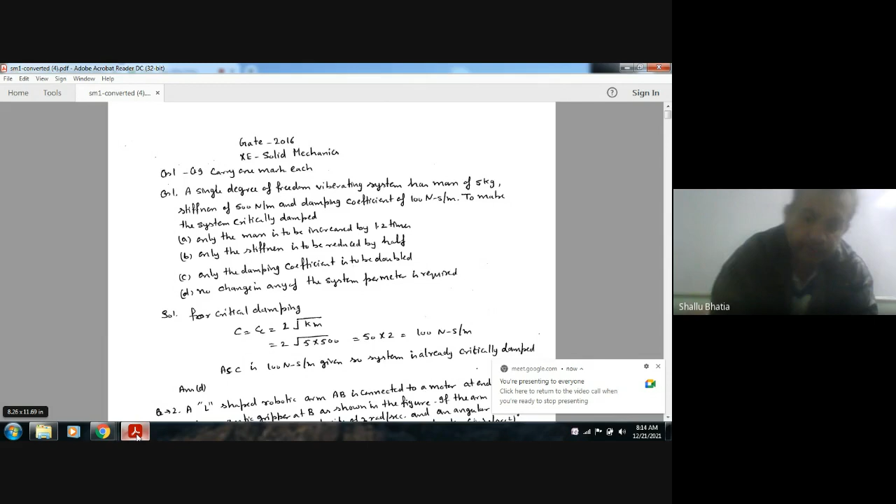Question 1: a single degree of freedom vibrating system has mass of 5 kg, stiffness of 500 Newton per meter and damping coefficient of 100 Newton second per meter. To make the system critically damped: Option A, the mass of the system is to be increased by 1.2 times. B, only the stiffness is to be reduced by half. C, only damping coefficient is to be doubled. D, no change in any of the system parameter is required.

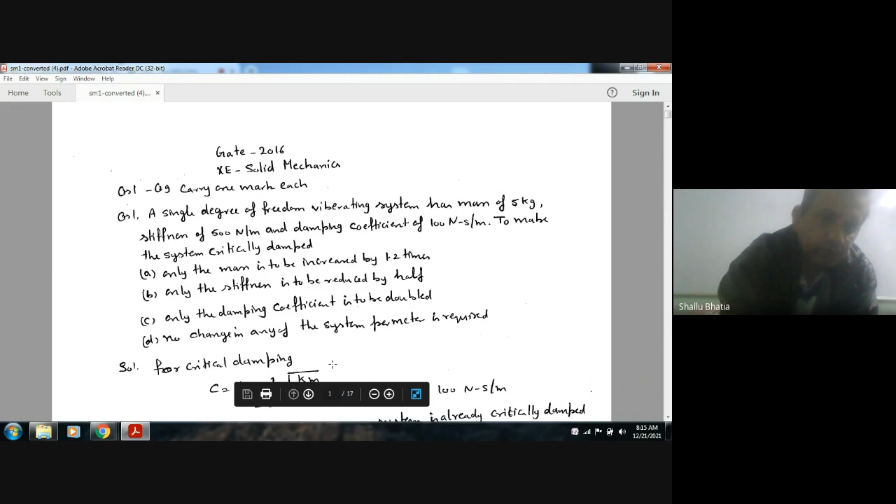So to make the system critically damped, we have to check its critical damping coefficient. The critical damping coefficient CC is given by CC is equal to 2 root K multiplied by M.

Here K is 500 Newton per meter, and mass is 5 kg. Finding out CC, that comes out as 100 Newton second per meter. Now the given C, the damping coefficient, is also 100 Newton second per meter. So there is no change required to make it critically damped because the damping coefficient is already according to the critical damping condition. So the answer is D.

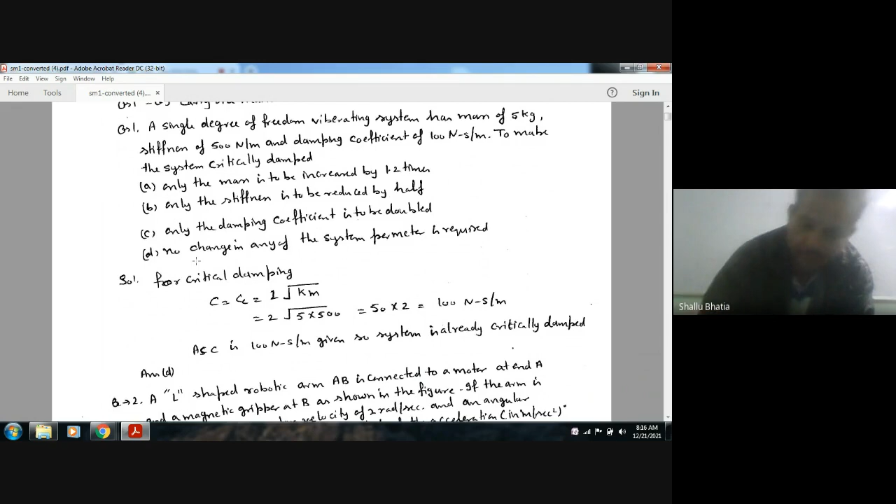Next: a L-shaped robotic arm AB is connected to a motor at end A and a magnetic gripper at B, as shown in the figure. If the arm is rotating with an angular velocity of 2 radian per second and angular acceleration of 3 radian per second square, the magnitude of acceleration in meter per second square at end B is required.

We have to find the acceleration of this end, where omega is 2 and alpha is 3 radian per second. First, this is the point about which the arm is rotating, so we calculate the distance to get the radius. This is point 0.4, this is point 0.3, so it should be point 0.5.

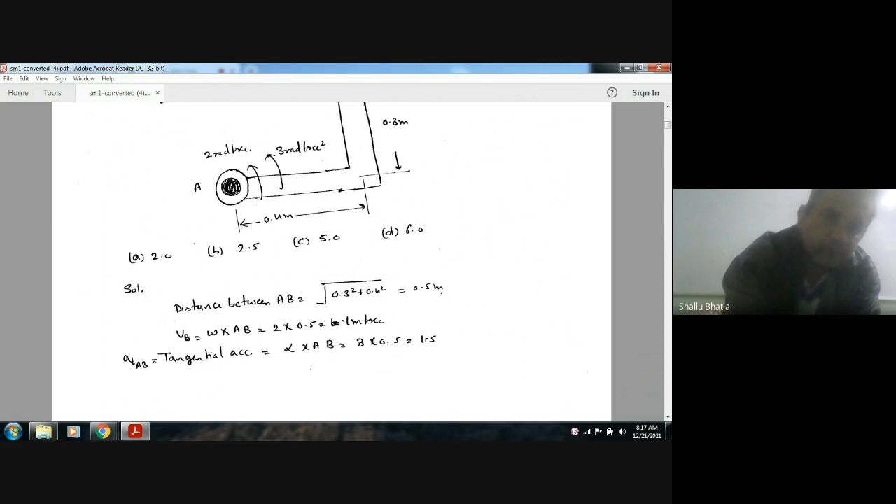The distance is 0.5 and angular velocity is 2 radian. The velocity of point B is omega into AB, that is 2 into 0.5, that is 1 meter per second. Now the tangential acceleration: alpha is 3 radian per second and AB is 0.5, so tangential acceleration is given by alpha into AB, that is 3 into 0.5, that is 1.5 meter per second square.

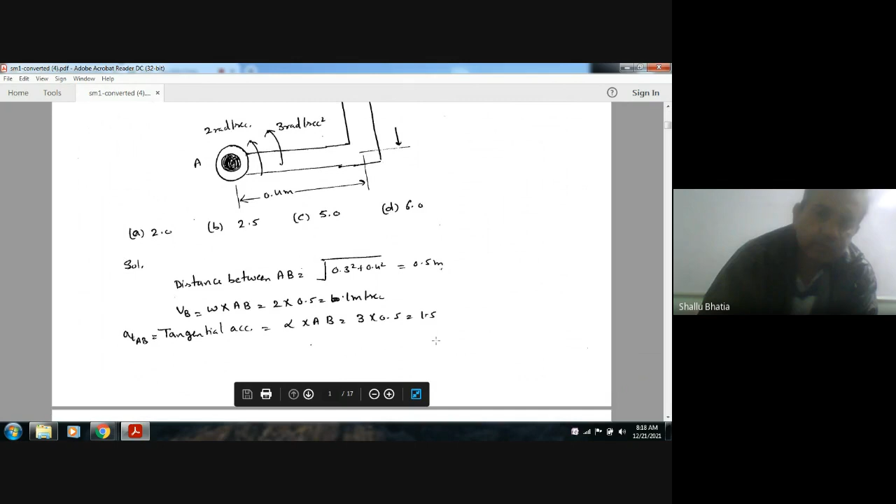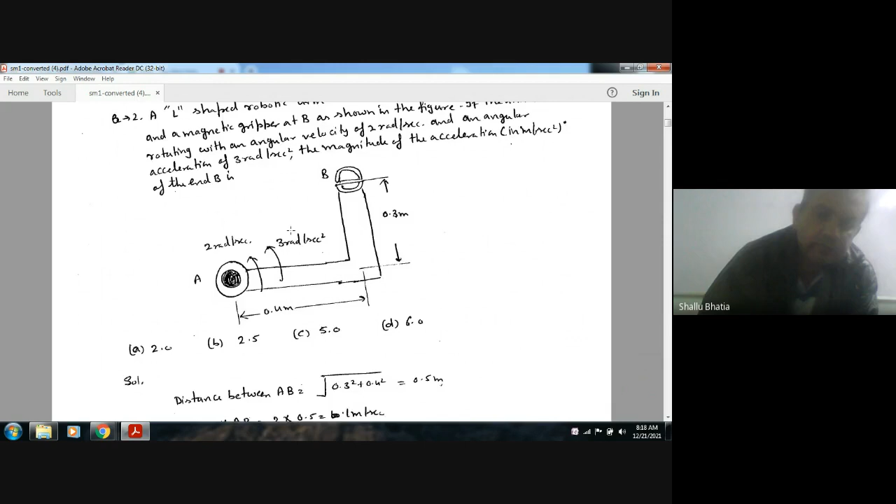There is also centripetal acceleration due to the rotation, which acts from the point where we need to find it toward the center. So it will act like this, and its magnitude is v square by radius. Radius is 0.5, so centripetal acceleration is 2.

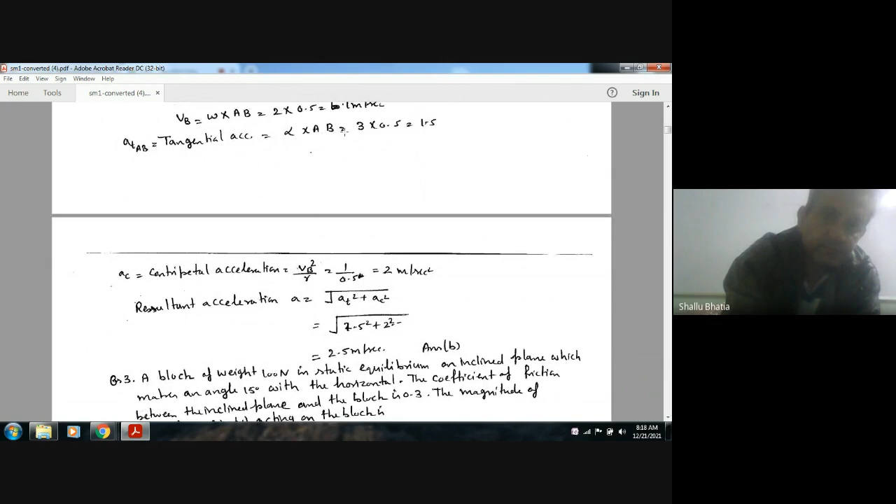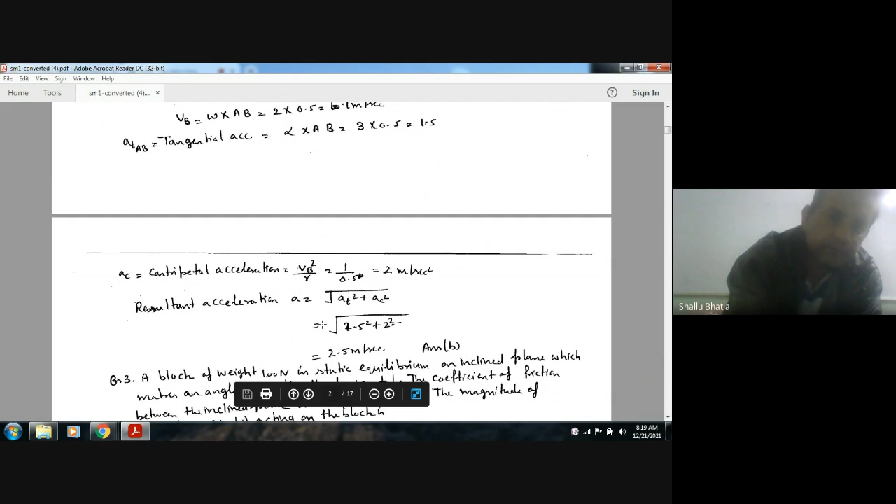The tangential acceleration acts perpendicular to AB and the centripetal acceleration acts toward A. So resultant acceleration is obtained by scaling 1.5 and 2, squaring and adding, then square rooting: 1.5 square plus 2 square gives resultant acceleration of 2.5. Option B is the right answer.

Next: a block of weight 100 Newton in static equilibrium on an inclined plane which makes an angle of 15 degree with the horizontal. The coefficient of friction between the inclined plane and the block is 0.3. The magnitude of friction force acting on the block is required. So this is a block given with weight 100 Newton, angle alpha 15 degree, and we have to find the magnitude of friction force acting on the block.

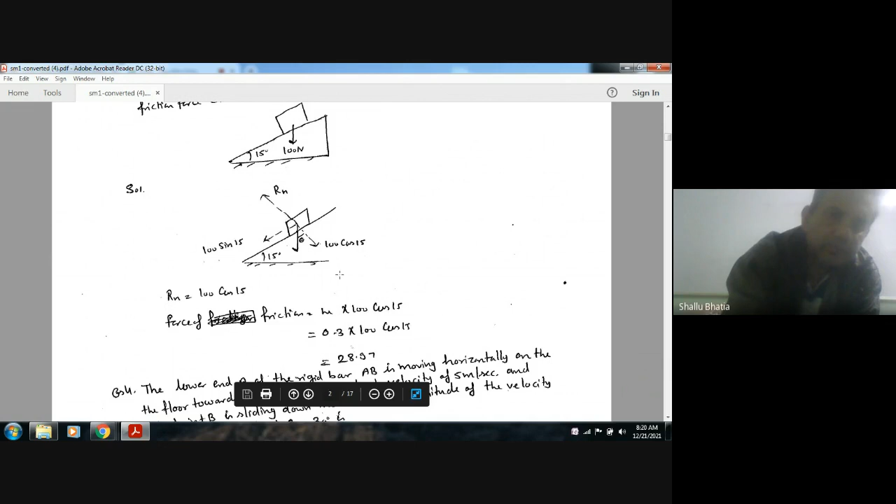Weight is 100 Newton, its component in this direction is 100 cos 15 and in this direction it is 100 sin 15. Balancing this, Rn is equal to 100 cos 15. The friction force will be according to laws of limiting friction, that is mu Rn. So mu is 0.3 and 100 into cos 15, giving 28.97 Newton.

Next, question number 4: the lower end of the rigid bar AB is moving horizontally on the floor towards right with a constant velocity of 5 meter per second.

This end is moving with velocity 5 meter per second. The point B is sliding down on the wall. The magnitude of velocity of point B at instant theta equal to 30 degree is to be found. Option A 0, option B 4.34 meter per second, option C 7.25 meter per second, option D 8.66 meter per second. Now this can be solved by using instant center.

We assume there is a slider at point A and also a slider at point B. This slider is moving in this direction and this slider is moving downward. So we take this as the fixed link, these two as sliders, and this as link 3. This is link 2, this is link 3, and this is link 4.

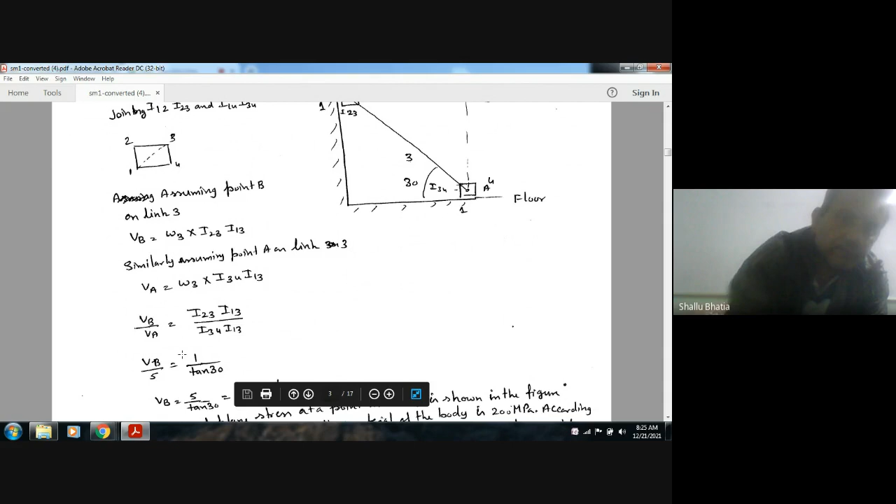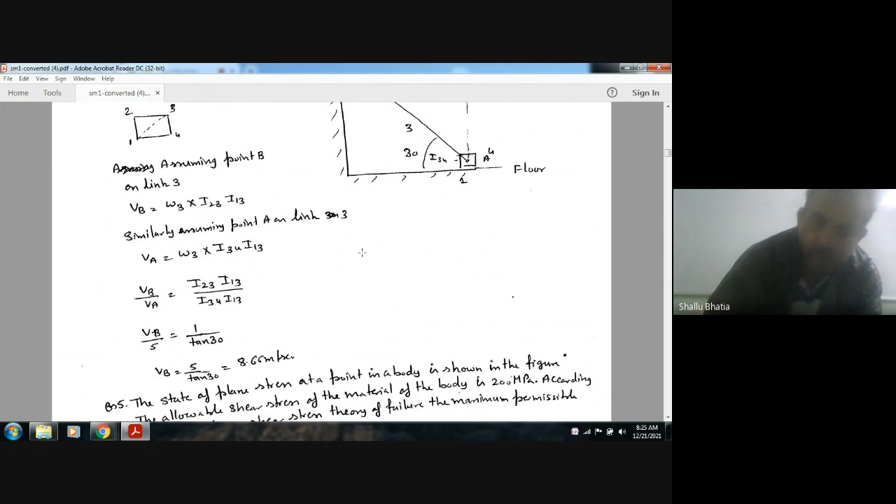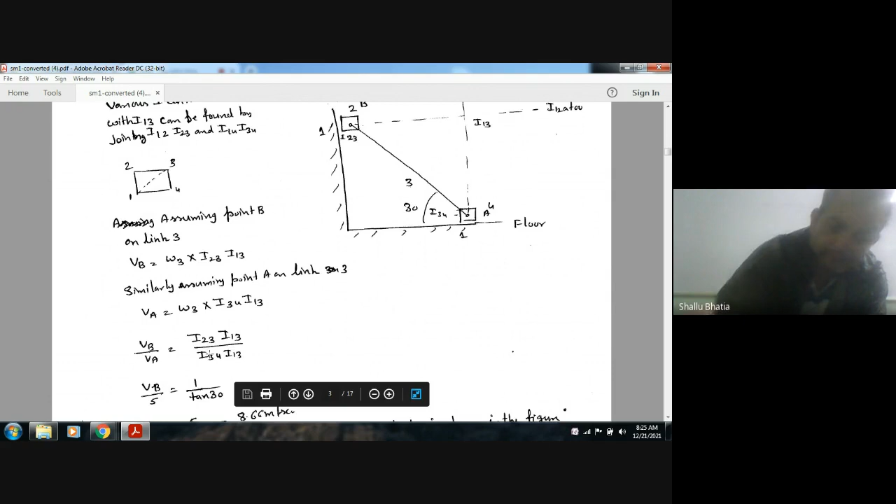So VB by VA: VA is your velocity 5, and this angle is your 30 degrees. I23 I13 by I34 I13, this will be base by perpendicular, that is cot, or 1 by tangent 30. So from this, as V is given as 5, we can find out VB.

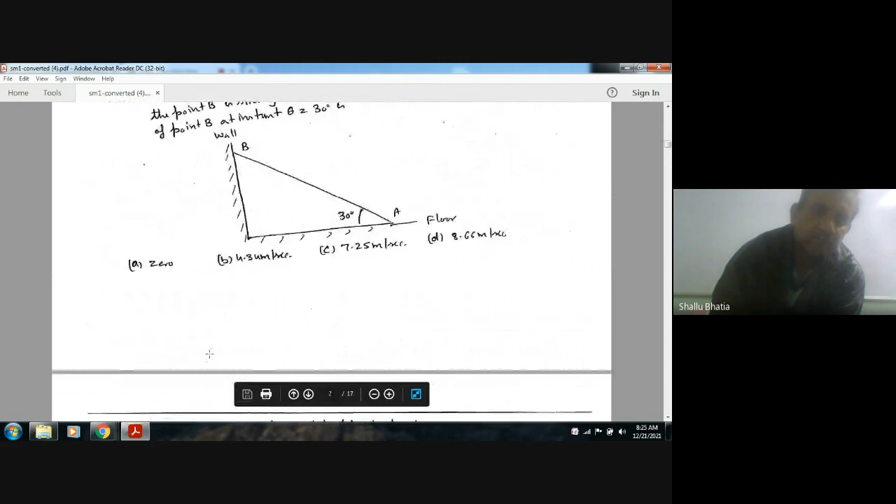That is 8.66 meter per second, so the answer here is 8.66. So when the velocity of A is 5, the velocity of B in turn is 8.66.

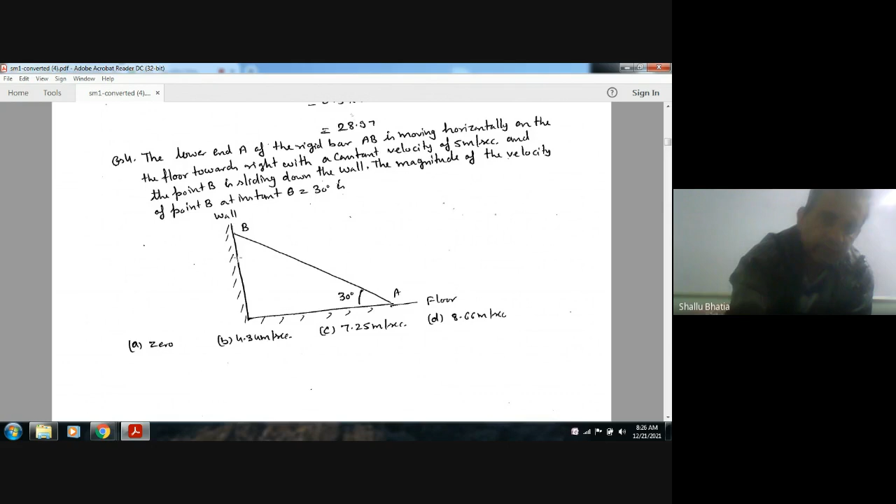Next question. The state of plane stress at a point in a body is shown in the figure. The allowable shear stress of the material of the body is 200 MPa. According to the maximum shear stress theory of failure, the maximum permissible value of sigma in MPa is?

So this is your diagram: this is sigma, sigma. This is compressive stress, this is tensile stress. So maximum shear stress in this case is sigma plus sigma by 2, because this is the maximum principal stress and this is the minimum principal stress. Maximum shear stress is given by sigma 1 minus sigma 2 by 2, so the maximum shear stress is sigma plus sigma by 2, that is sigma.

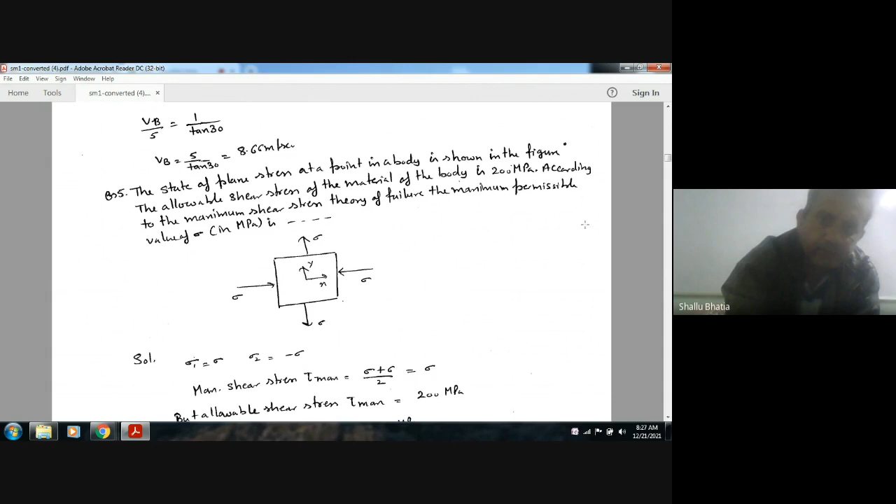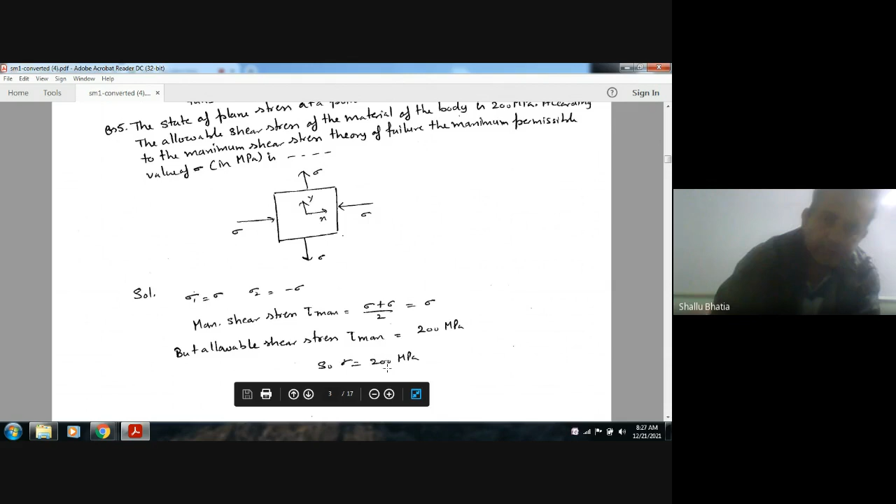Now allowable shear stress is given as 200 MPa. According to maximum shear stress theory, since maximum shear stress is also sigma, sigma should be 200 MPa. So the answer is 200 MPa. Next.

For a cylindrical steel column of circular cross section, the critical buckling load is PCR. If the diameter of the column is doubled, keeping other material and geometrical parameters the same, then the critical buckling load of the column is: option A PCR by 16, B 8 PCR, C 2 PCR, D 16 PCR. So this is the PCR, PCR is the critical load.

Now for the in general for the pin jointed case, conditions for end joints are not given, so we take the general case. Let us take pin jointed end. PCR is pi square EI for pin jointed, that is pi square EI by L square.

Now it is given that the joints are not changed, but other parameters like diameter is doubled. So initially for PCR, only I is the factor, and only the diameter is dependent. So PCR is directly proportional to I, and I is directly proportional to D4. Now diameter is doubled, so the new PCR or PCR1 involves 2D4. By this ratio we get PCR by PCR1 equals 1 by 16. So PCR1 is 16 times PCR. Option D.

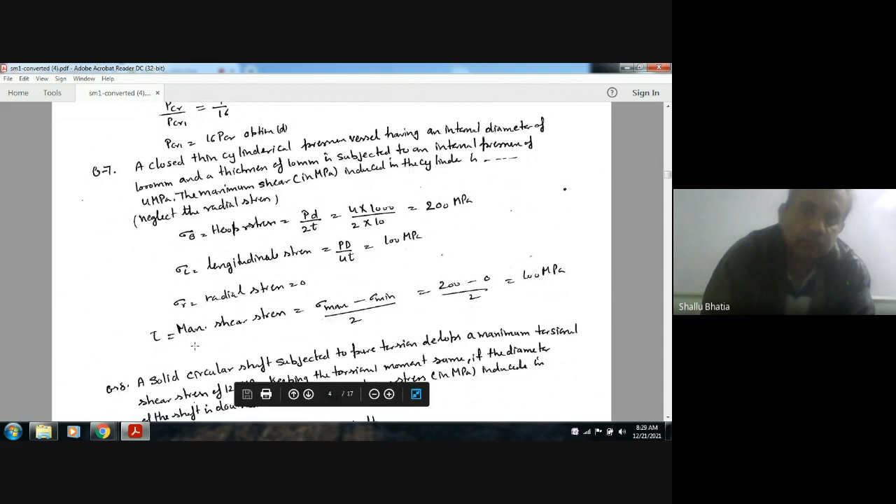Next, a closed thin cylindrical pressure vessel having an internal diameter of 1000 mm and a thickness of 10 mm is subjected to an internal pressure of 4 MPa. The maximum shear in MPa induced in the cylinder is to be found, neglecting the radial stress, meaning the radial stress is zero. In a thin pressure vessel, the maximum stress is hoop stress, equal to PD by 2T, and longitudinal stress is PD by 4T.

Putting P equal to 4 MPa, D equal to 1000 mm, and T equal to 10 mm, sigma theta is 200 MPa, and sigma L is 100 MPa. Sigma R is zero. So maximum stress is 200 and minimum is 0. Maximum shear stress is sigma max minus sigma min by 2, that is 200 minus 0 by 2, or 100.

Next, a solid circular shaft subjected to pure torsion develops a maximum torsional shear stress of 120 MPa. Keeping the torsional moment same, if the diameter of the shaft is doubled, find the maximum shear stress in MPa induced in the shaft. Torsional shear stress is 120 MPa, so tau is 120 MPa. If diameter is D, then tau is 16T by pi d cube equals 120 MPa.

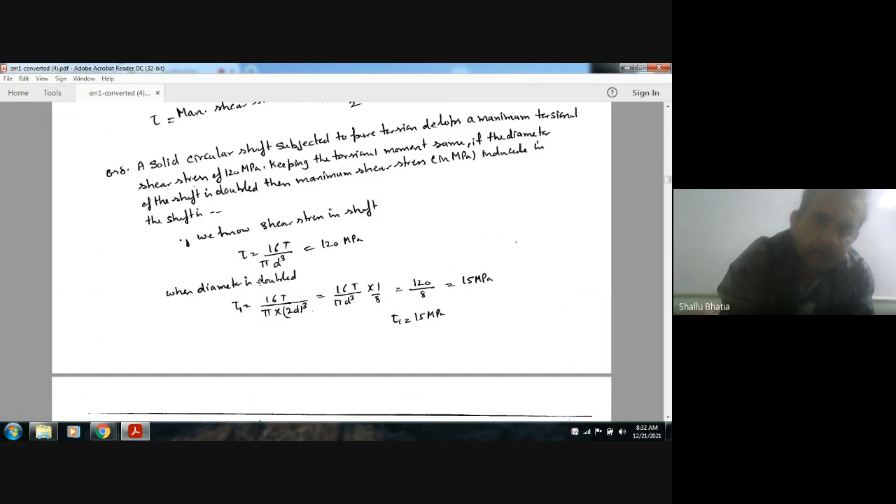Now if the diameter is doubled, for the same torque, tau1 will be 16T by pi (2d) cube. This value is 120 MPa, so it will be 120 by 8, or 15 MPa.

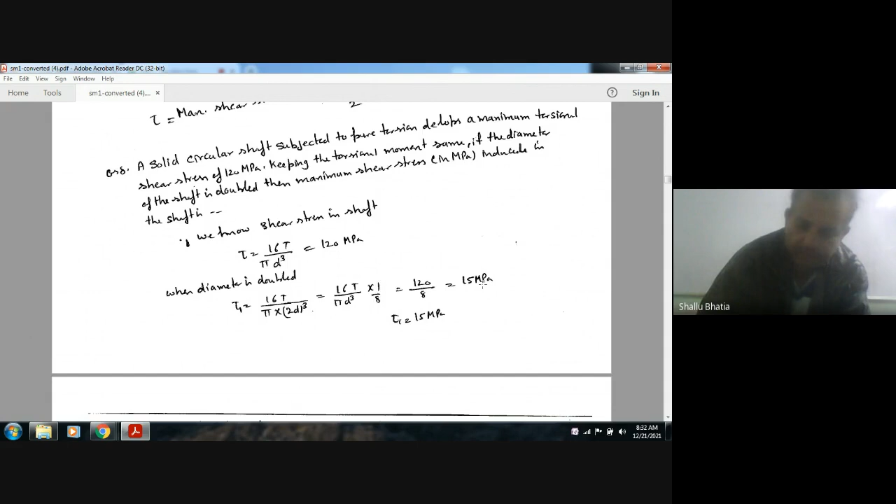Next: on a single straight track, a vehicle of mass 500 kg moving with a velocity of 25 meter per second strikes another vehicle of mass 250 kg moving with a velocity of 10 meter per second in the same direction. After the impact, if both vehicles stick together, find the common velocity. This can be solved by conservation of momentum, so momentum before impact should equal momentum after impact. Momentum before impact is mass of vehicle 500 into velocity 25, and mass of other vehicle 250 into velocity 10. So total momentum is 500 into 25 plus 250 into 10.

Suppose after the impact the velocity is v, then the total mass is 500 plus 250, giving the final momentum. From this we can solve v is equal to 20 meters per second. Next, 2 marks question. So the answer is 20 meter per second.

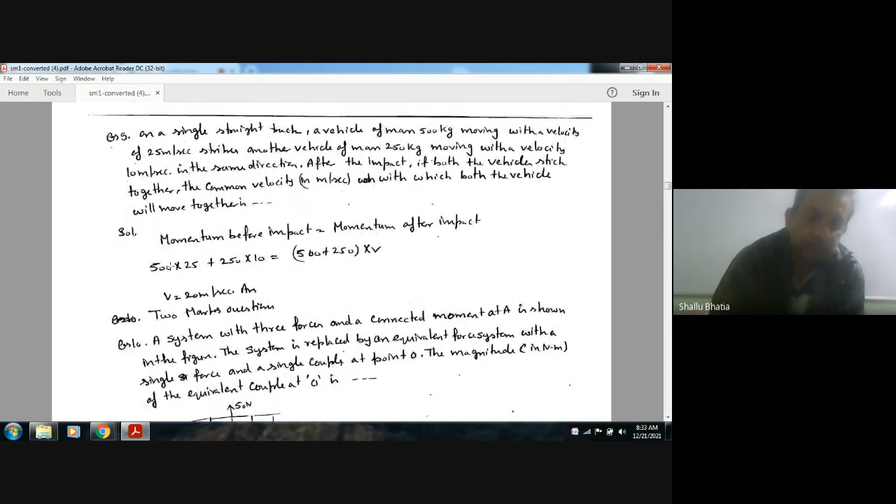Next question number 10: A system with three forces and a concentrated moment at A is shown in the figure. The system is replaced by an equivalent force system with a single force and a single couple at point O. Here 50 Newton load and 50 Newton meter torque is acting. The magnitude in Newton meter of the equivalent couple at O is to be found.

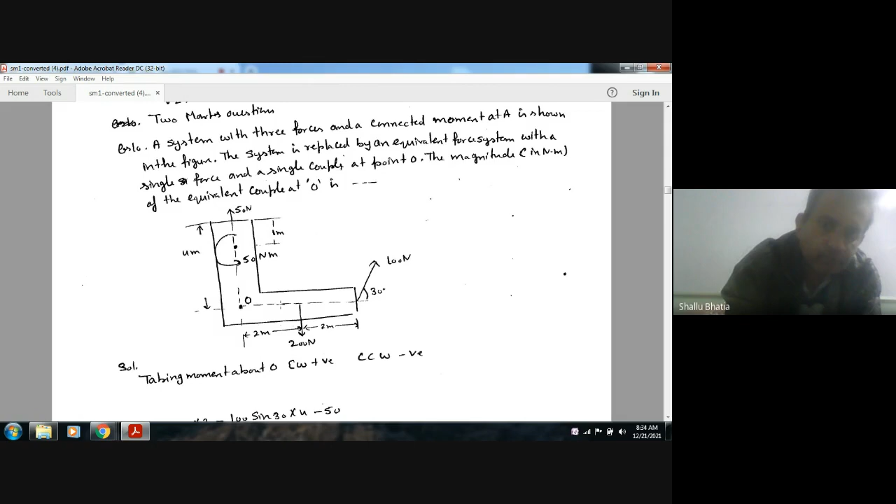Here 200 Newton is also acting, and here 100 Newton is also acting. This is the figure given. We have to find out the equivalent moment at O.

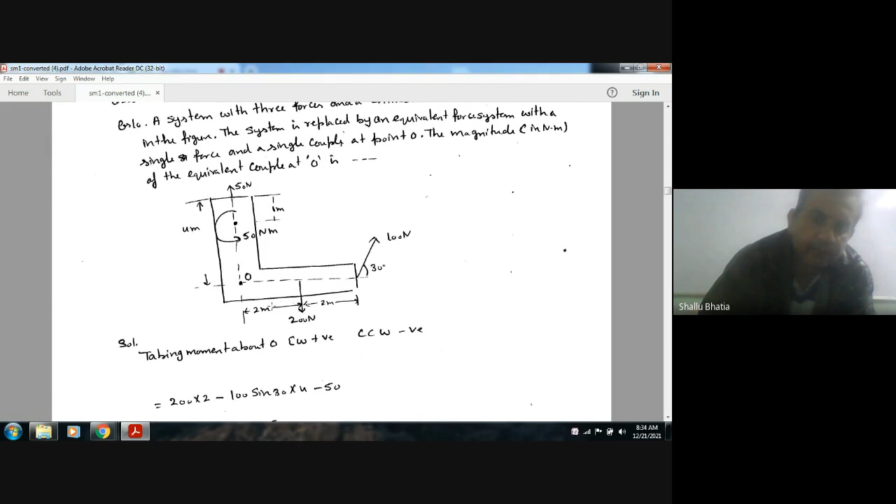Now taking moment about O, taking clockwise positive and anti-clockwise negative: this 200 into this 2 will be clockwise, like this. And your 100 into this, this is point O for you, this point is O, 100 into 4.

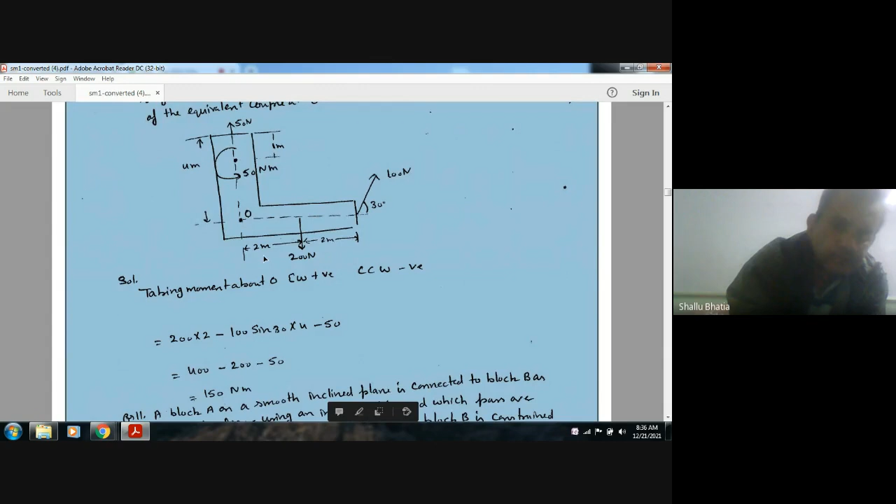Its horizontal component will pass through O, and the vertical component will create moment: 100 sine 30 into 4, that will be anti-clockwise. And minus 50 will be anti-clockwise; this 50 will pass through O. So we get: 200 into 2 minus 100 sine 30 into 4 minus 50.

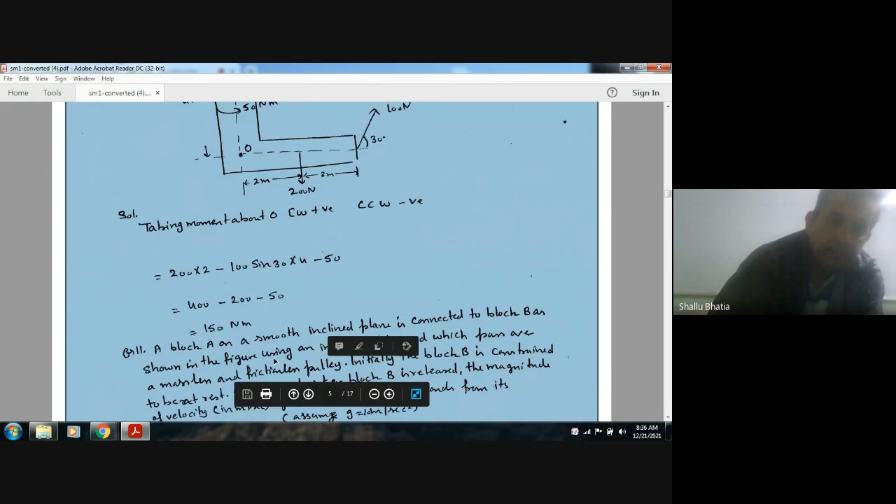So 400 minus that comes out as 150 Newton meter. So this load, and the horizontal component of this load, will pass through this point. Next.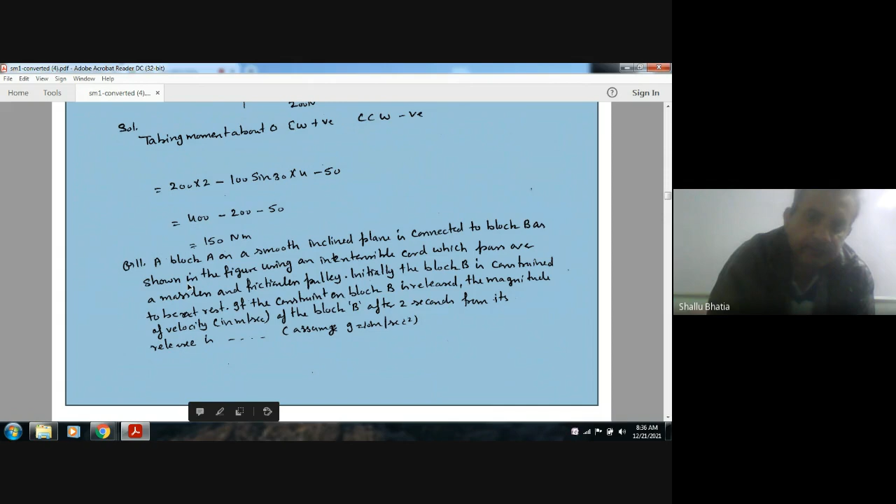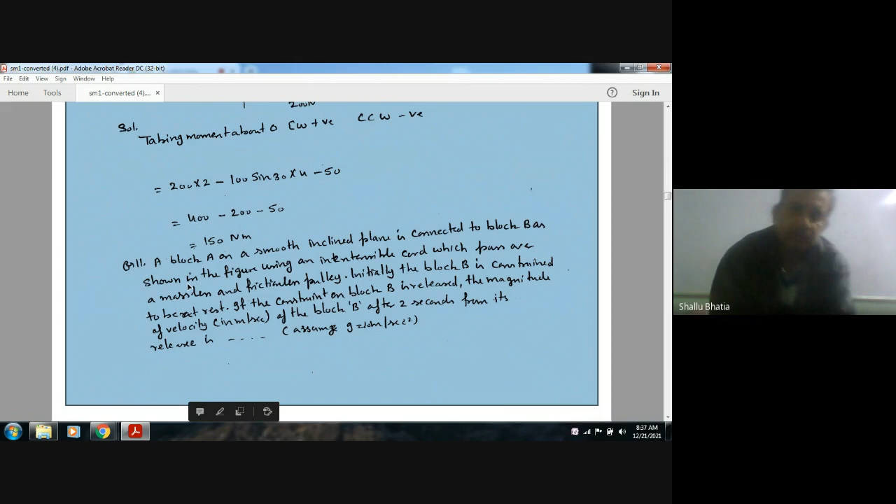Block A on a smooth inclined plane is connected to block B as shown in the figure, using an inextensible cord which passes over a massless and frictionless pulley. Initially, block B is constrained to be at rest. If the constraint on block B is released, find the magnitude of velocity of block B after 2 seconds from its release. Options are not given, assume G.

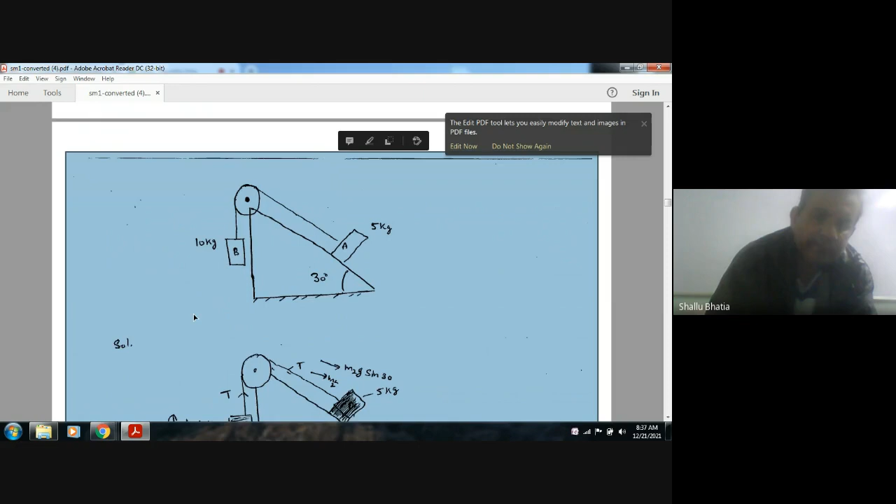So this is the block, this is the figure given. This is block A and this is block B. Initially they are at rest because of the constraint provided in the 10 kg block. Now when the constraint is removed, block B will start moving downwards, so its inertia force will act in the upward direction, the weight will act in the downward direction, and tension in the cord will be in the upward direction.

So for block A... sorry, this is for block B. Now for block A,

the weight acting along the inclined plane will be M2G sin 30, and perpendicular to the inclined plane will be M2G cos 30. Since the inclined plane is smooth, there is no friction, so we need not take the normal component, because the normal component is responsible for the force of friction. So we will take only this component of weight, M2G sin 30.

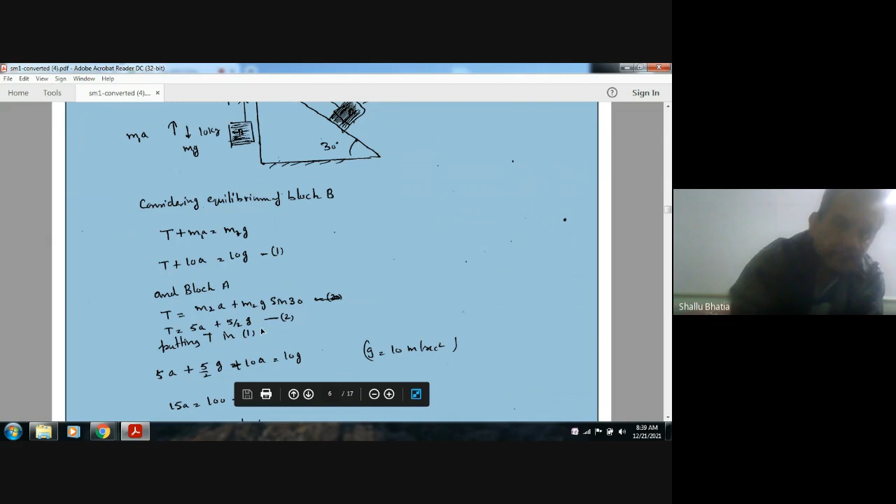So from equations 1 and 2, equating T and solving for A, we get A equals 5 meters per second squared.

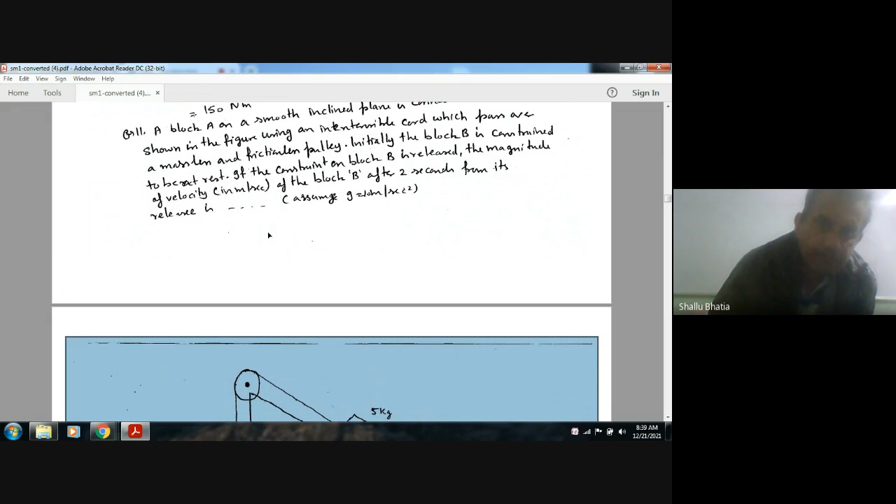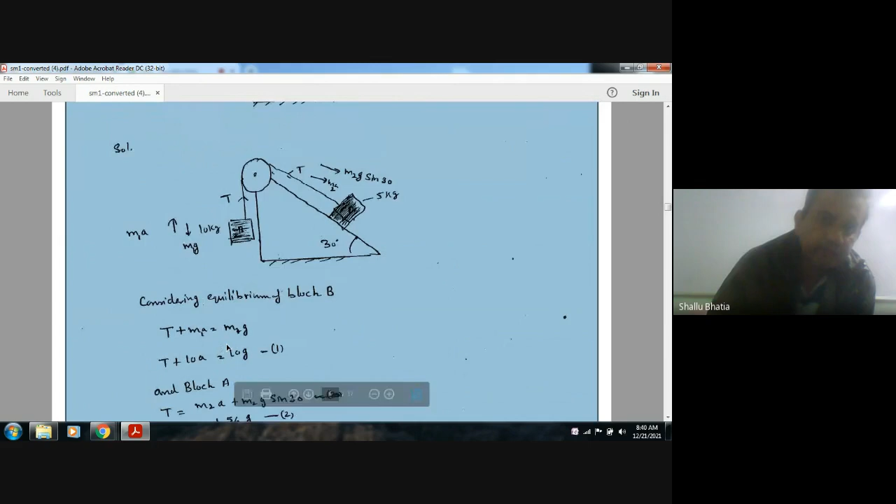Now we have the acceleration of this block and this block. So the question is, what is the magnitude of velocity of block B after 2 seconds? When the constraint is just removed, the velocity is zero, and acceleration is 5 meters per second squared.

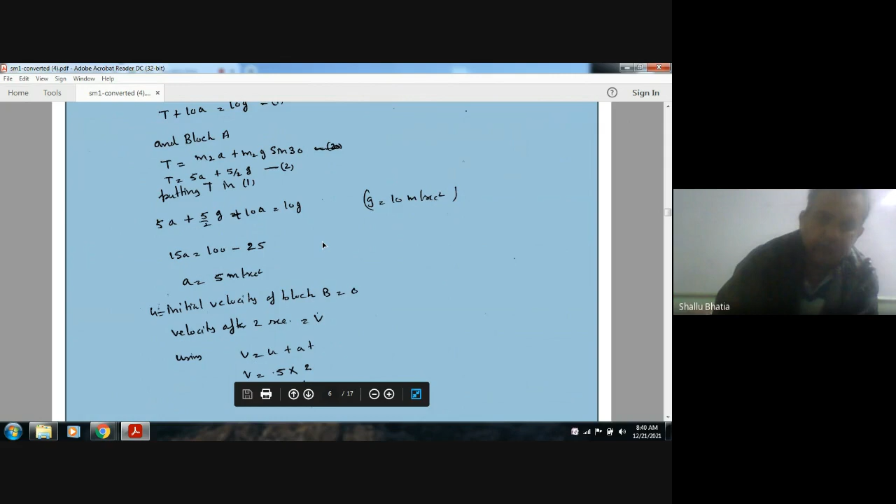Using V equals U plus AT, putting U equal to 0, A equal to 5, and T equal to 2, we get V equal to 10 meters per second. So the answer is 10.

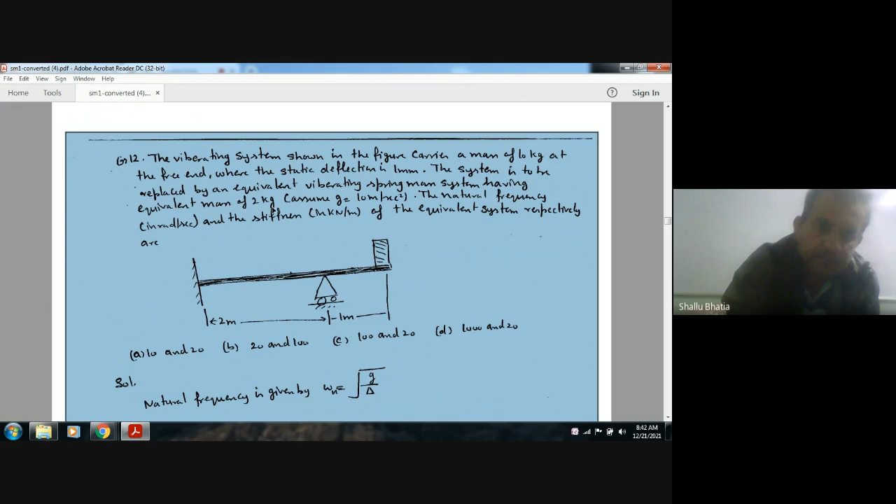Mass of the equivalent system is 2 kg. When we indicate it by a spring mass system, the mass is 2 kg. For the equivalent system, the frequency is root k by m. Now if you have the same frequency and put m equal to 2 kg, we can get k. So k is 20,000 Newton per meter, or 20 kilonewton per meter.

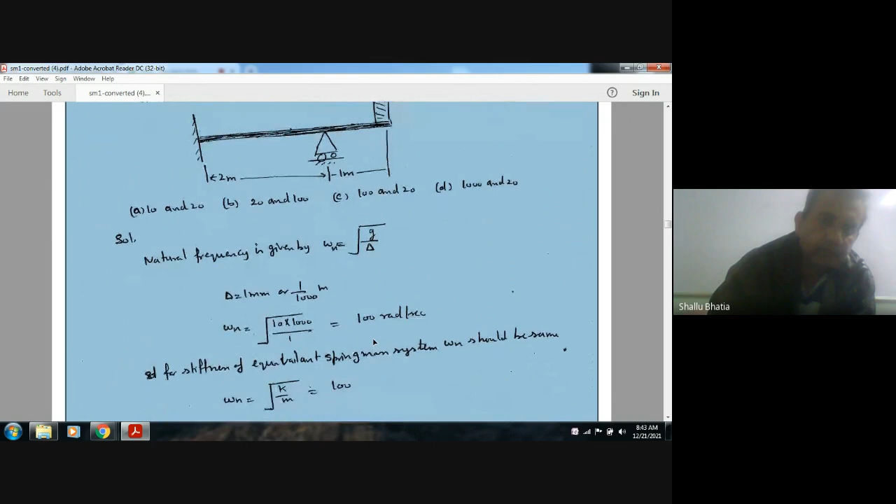So the answer is 100 and 20. Answer is C.

A beam having flexural rigidity EI and length L is subjected to a concentrated end moment M naught as shown in the figure. For EI equal to 4 into 10 to the power 3 Newton meter square, L equal to 1 meter, and M naught equal to 8 kilonewton meter, the strain energy stored in kilonewton meter in the beam and the rotation in radian at the free end respectively are: A) 8 and 0.02, B) 8 and 2, C) 8 and 0.04, D) 0.8 and 2.

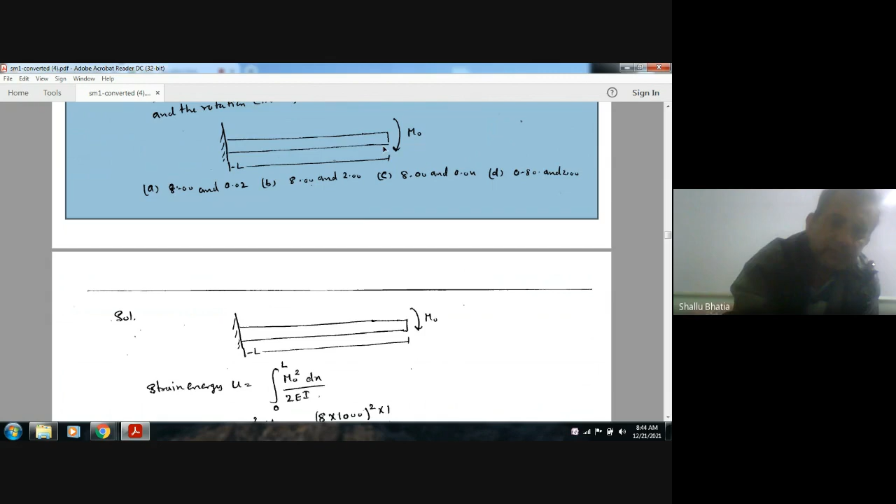So M naught is the bending moment. You have to calculate the strain energy stored and the rotation. The strain energy stored is M squared dx by 2EI. Here M is M naught because no extra load is being applied, only the moment is being applied. So strain energy is M naught squared L by 2EI. Putting the values of M naught, L and EI, we get strain energy as 8 kilonewton meter.

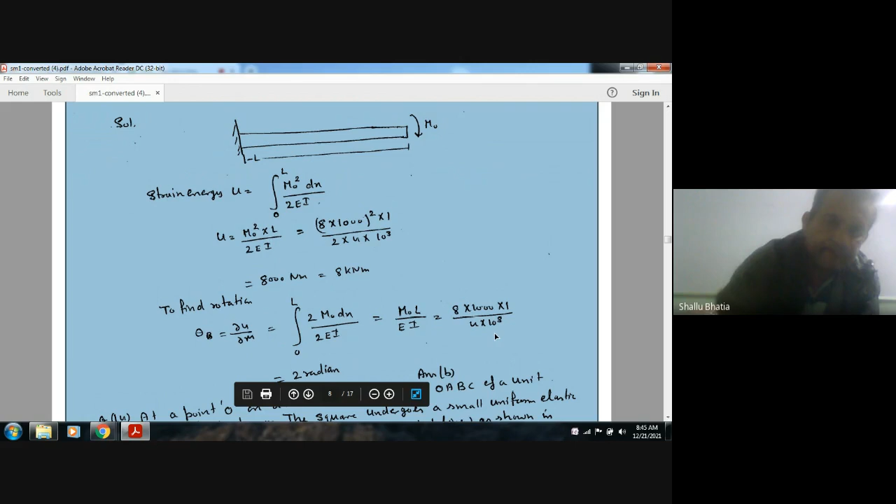To find the rotation, we have to differentiate this strain energy with respect to M. Differentiating this strain energy with respect to M, we get M naught L by EI. Putting in M naught L by EI, this gives 2 radian. So rotation is 2 radian.

So the answer is 8 and 2. Option B is the right answer.

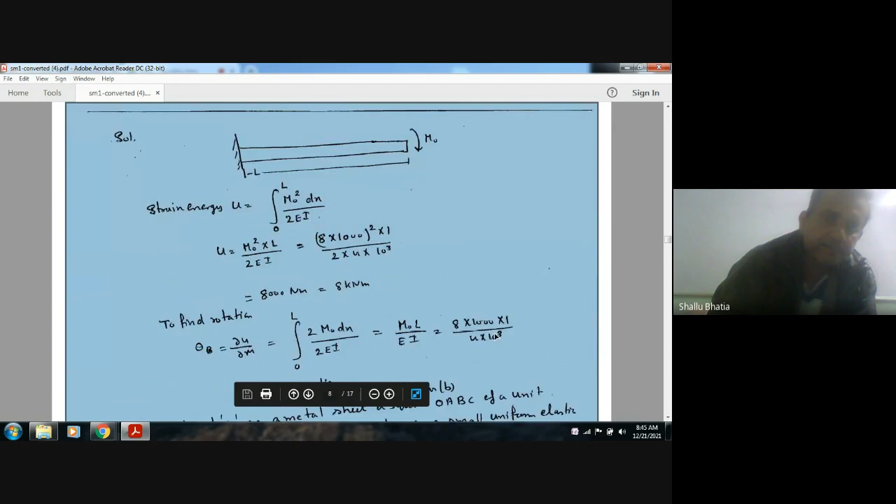At a point O on a metal sheet, a square OABC of unit side length is drawn. The sheet undergoes a small uniform elastic deformation and deforms to O A star B star C star. So initial shape is OABC and final shape is O A star B star C star, as shown in the figure. All dimensions are in mm and the figure is not to scale. The normal strains epsilon x, epsilon y, and shear strain tau xy developed here respectively are given in the options. We will find the values and then check the option.

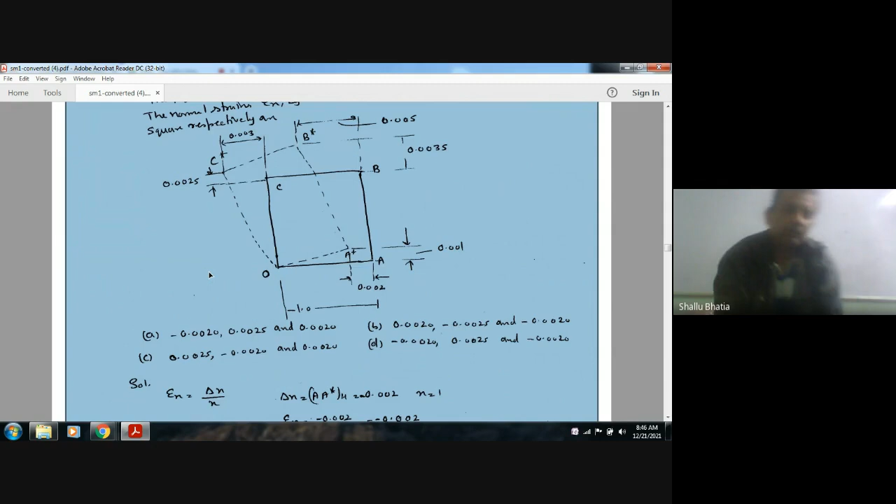We can see that this x dimension is initially 1, and now it is decreased by 0.002. So the change in x is 0.002, divided by 1. So the strain is minus 0.002 by 1, which is minus 0.002. So the answer will be one of A and D.

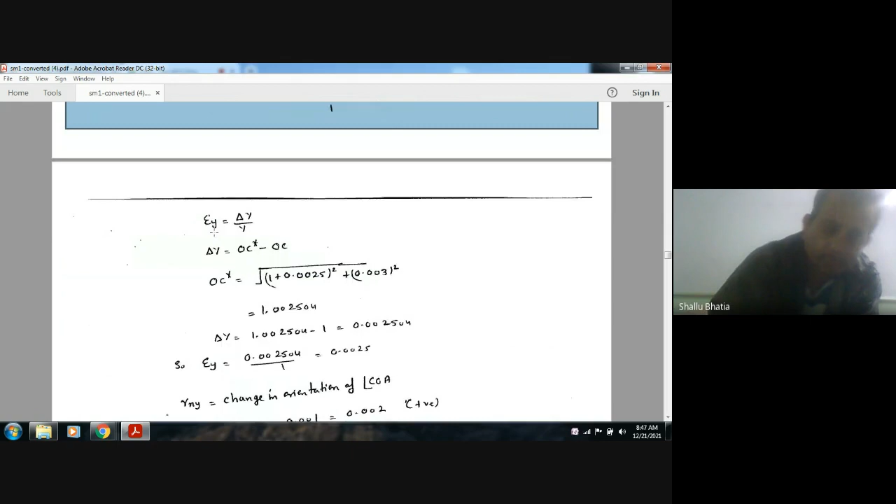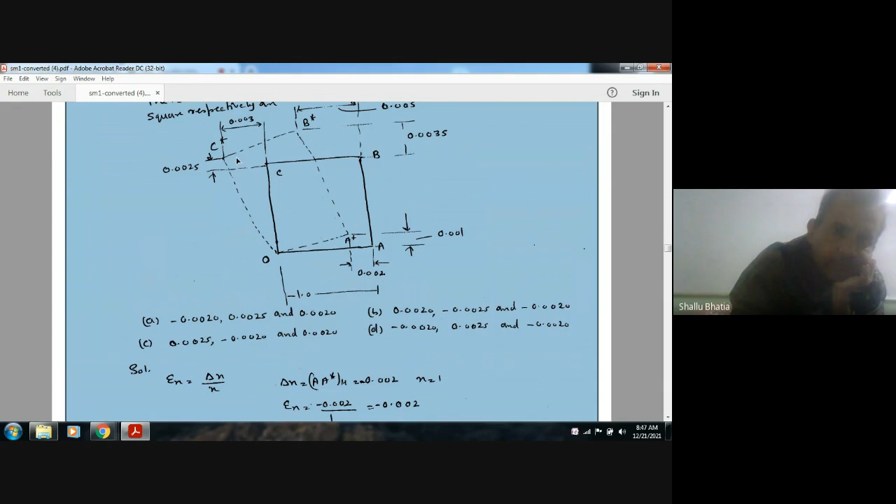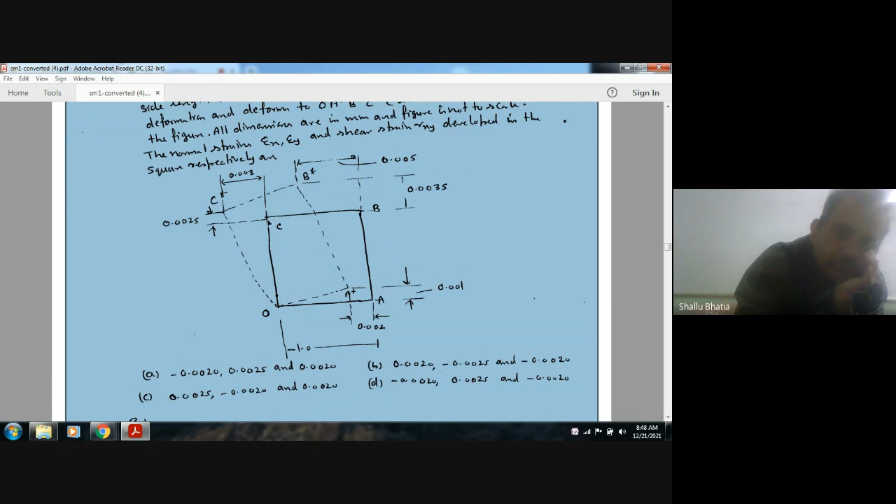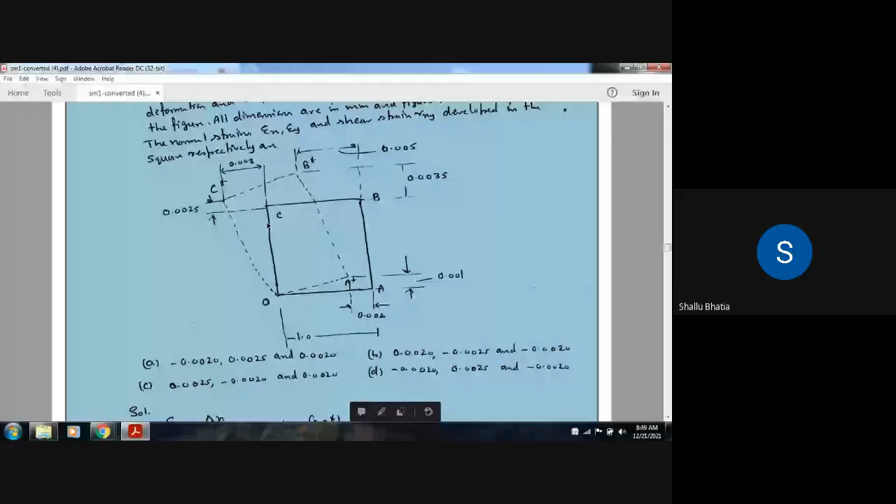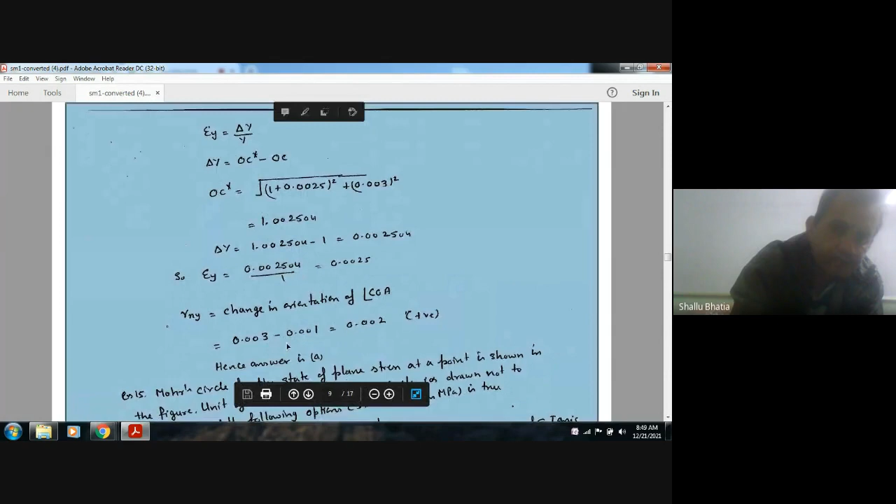The angle here is 0.003 divided by 1, and here the angle is 0.001 divided by 1. So this 90 degree angle is now changed to this angle, which is 90 plus 0.003 minus 0.001. So the change in orientation is 0.003 minus 0.001. The answer is 0.002, because here it is increased and here it is decreased, so the net change is 0.003 minus 0.001, which gives 0.002. So the answer is A.

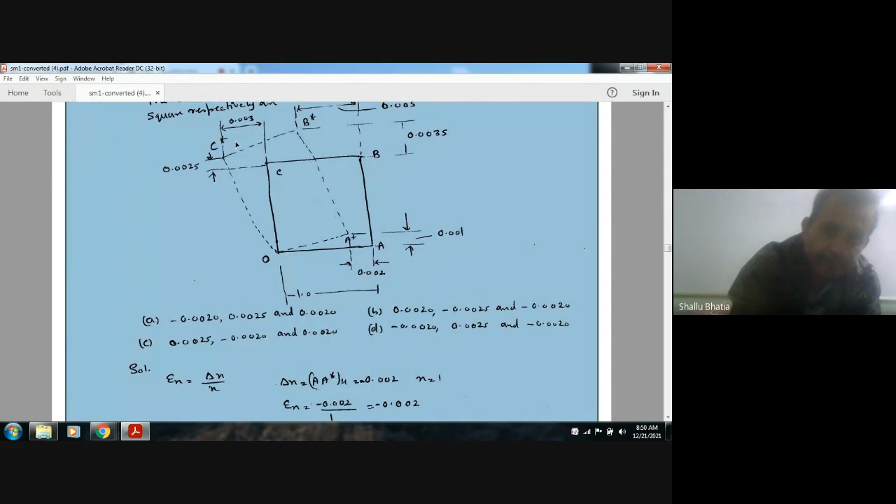Option A with epsilon y as 0.0025 and here 0.002.

Next, the Mohr circle for the state of plane stress at a point is shown in the figure. The unit of stress is MPa and the circle is drawn not to scale. Which of the following options with stress values in MPa is true? We have to find sigma A, sigma B, sigma 1, and sigma 2. Let us find out. We can see this is the origin of the Mohr circle and this is the center of the Mohr circle, and this is 30, this is 40, and this is 20.

So this is your sigma A, the distance O to A originally. Okay, O to A originally.

So this is 30, this is 20, and this is negative direction, so it will be minus 50. So the answer is either A or B.

Okay, now let us calculate B. Now this dimension is your 30.

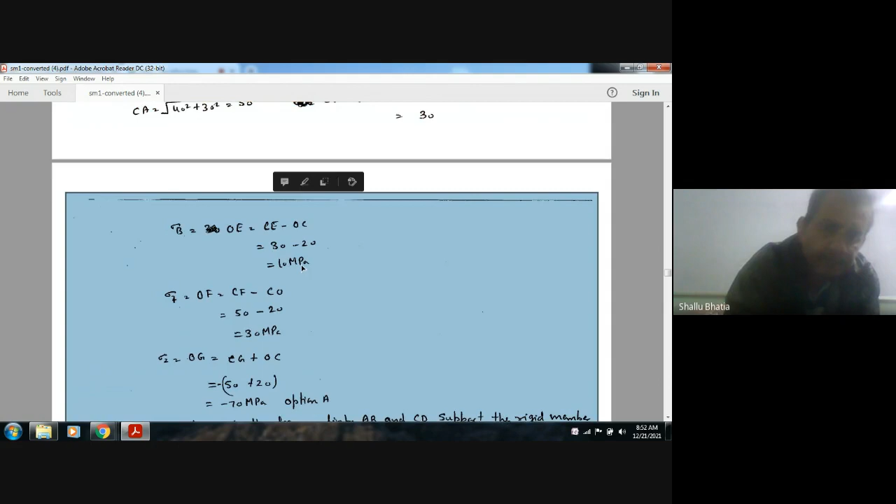Sigma B is your 10. So the answer is A. Okay, you can find out other quantities also, but the answer is A.

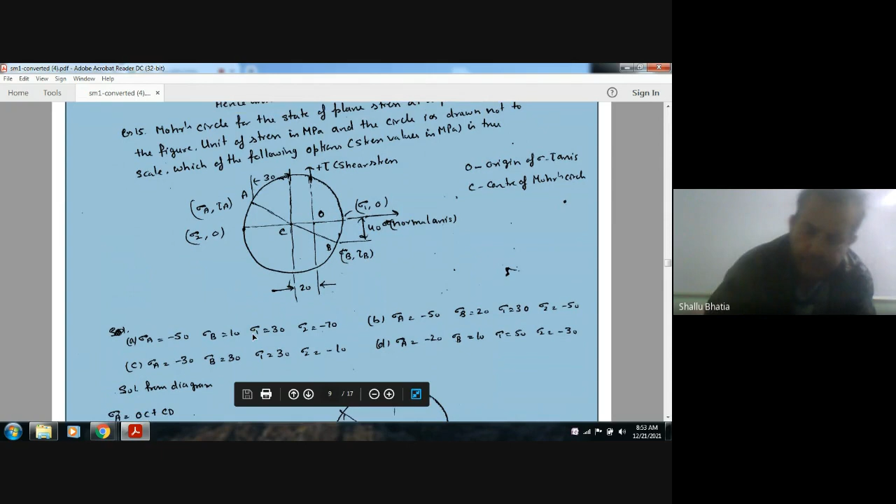So now sigma 1 is this. If it is maximum, then it is OF. OF is your CF minus CO.

CF minus CO. So CO is 20 and CF...

OF. Okay, CF is your radius. Okay, radius is 30, oh sorry, 50. So 50 minus...

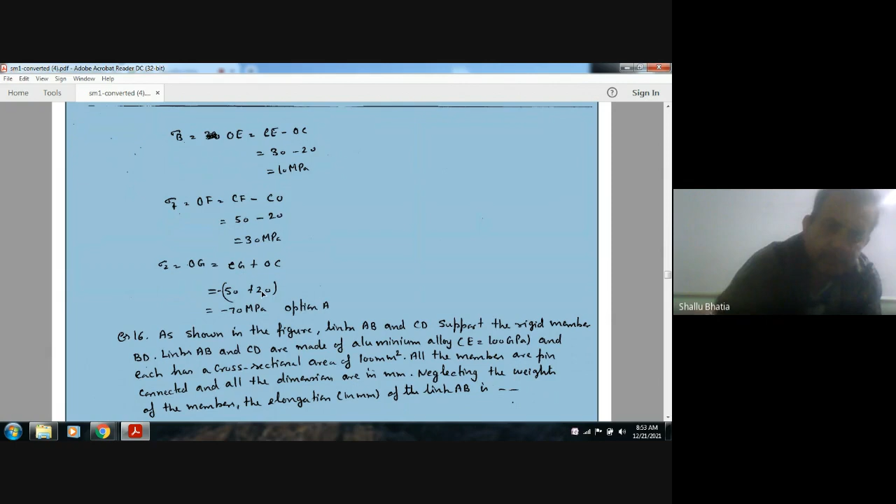20. Okay. Similarly, you can find out this is 20 and radius plus summation of this 20. So this is 20, this is 20, this is 50, and this is 20.

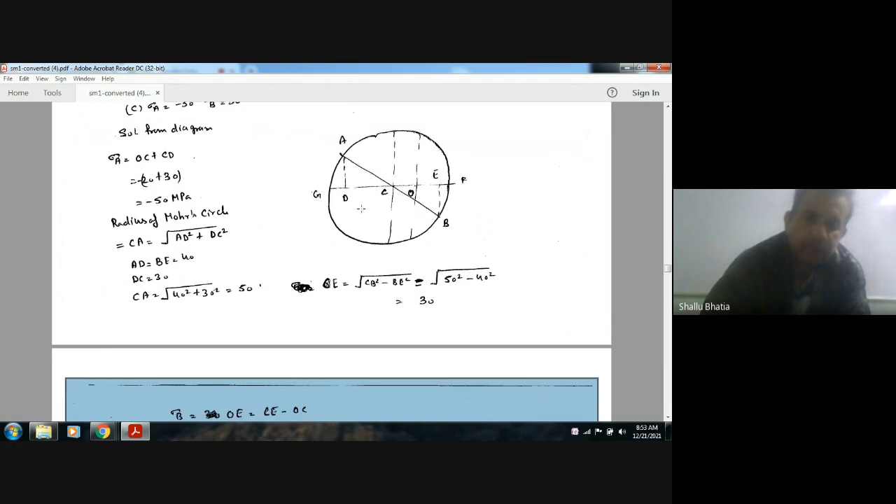So we can find out other quantities also. So option A is the right answer.

Okay, next, as shown in the figure, link AB and CD support rigid member BD. Link AB and CD are made of aluminum alloy.

E is equal to 100 GPa, and each has a cross-section area of 100 mm square.

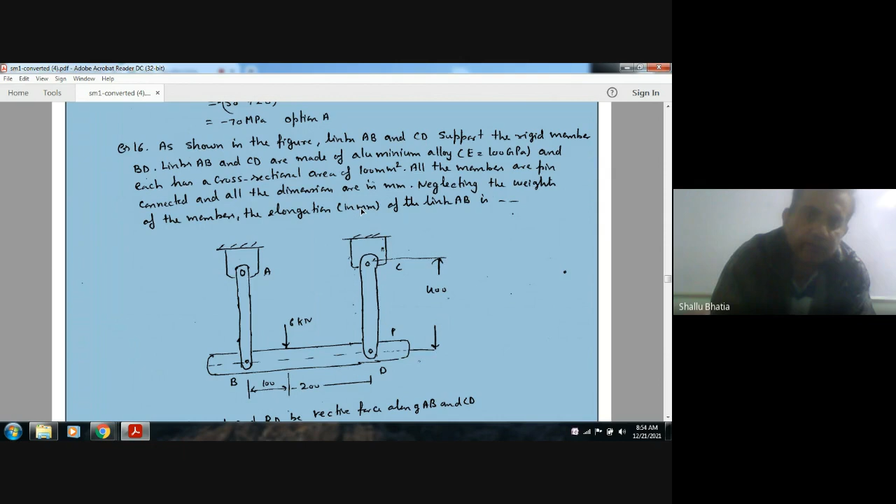All the members are pin connected and all the dimensions are in mm. Neglecting the weight of the member, elongation of the link AB is...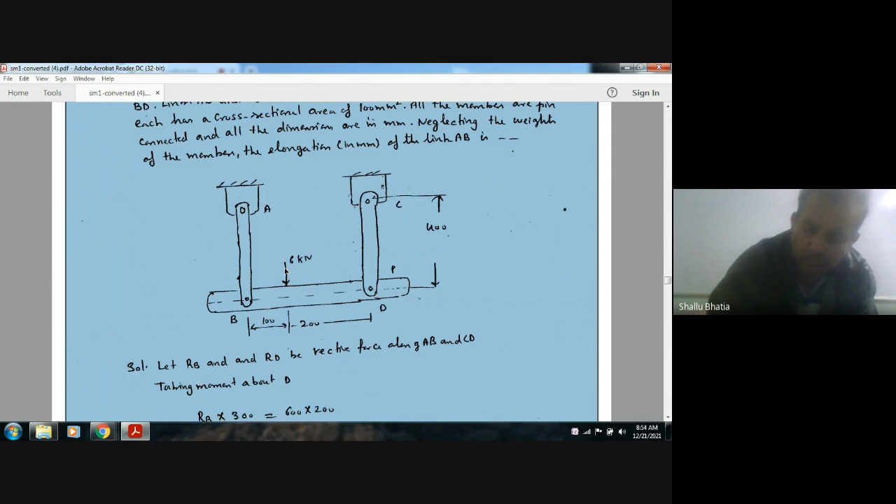Elongation of the link AB is now... area is 100 mm square. Okay, cross section area is 100 mm square. So AB and CD support the member.

Okay, now here a 6 kilonewton load is active. Okay, now the effect of the 6 kilonewton load will be the reaction on this AB.

Okay, now let RAB and RCD be the reactions or the forces shared by the two members.

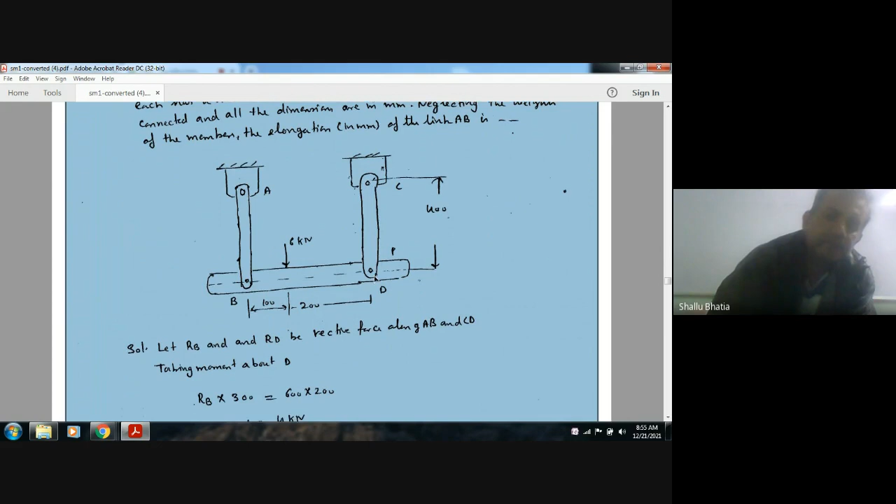Okay, now taking moment about this D joint, so RB into 300 is equal to 600, sorry it should be 6,000.

6,000 into 200, it should be 4 kilonewton. So the answer is, sorry, 4 kilonewton.

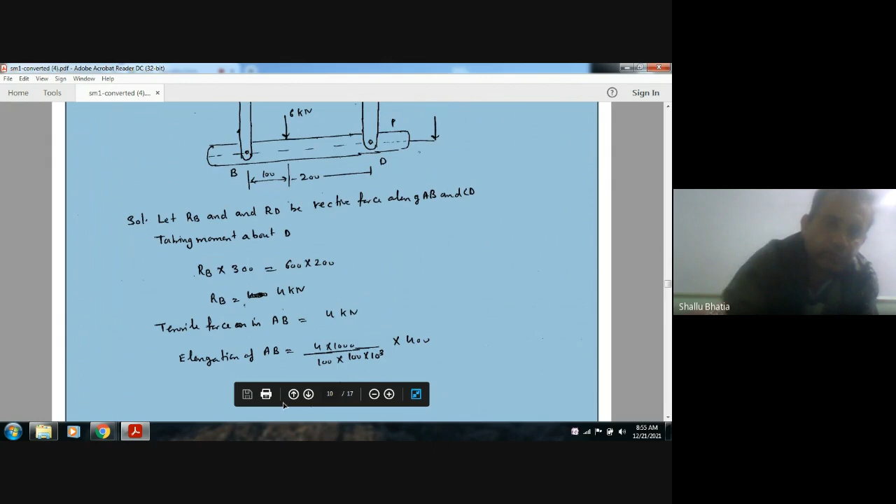Okay, now the load carried by this AB is 4 kilonewton. So we can find out the extension. So 4 into 1000 divided by area.

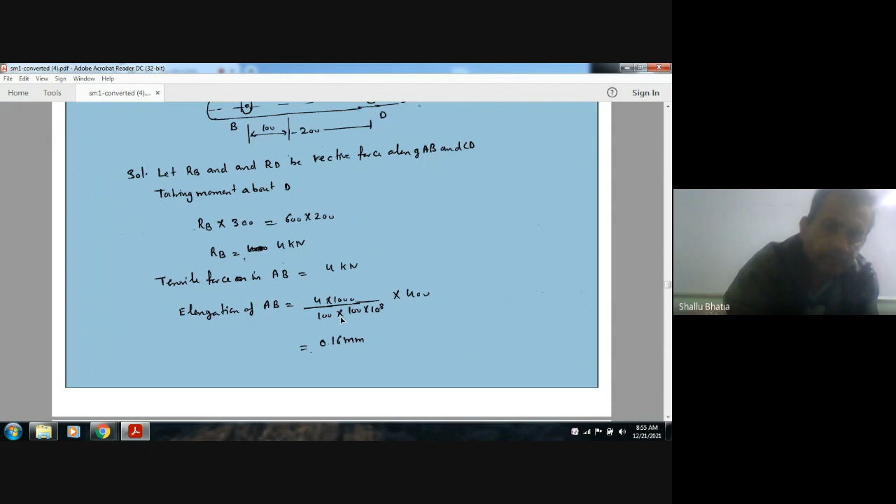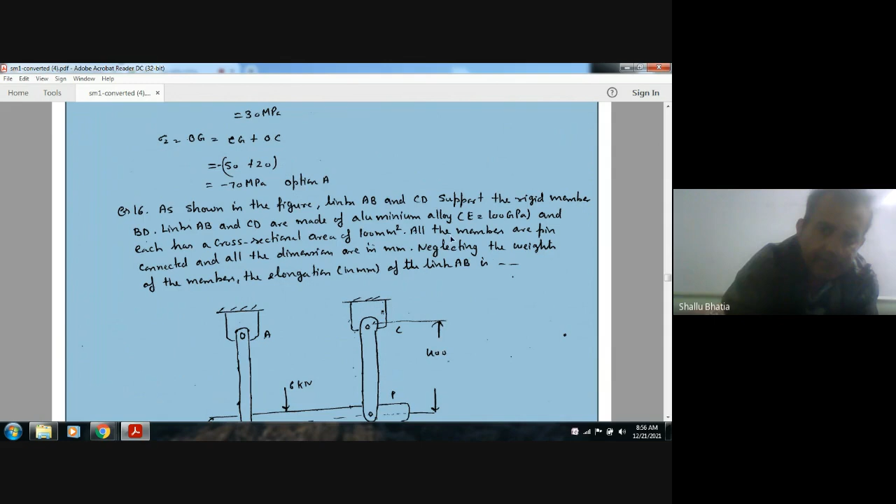Okay, E is 100 GPa. AE 100. Okay, E into L.

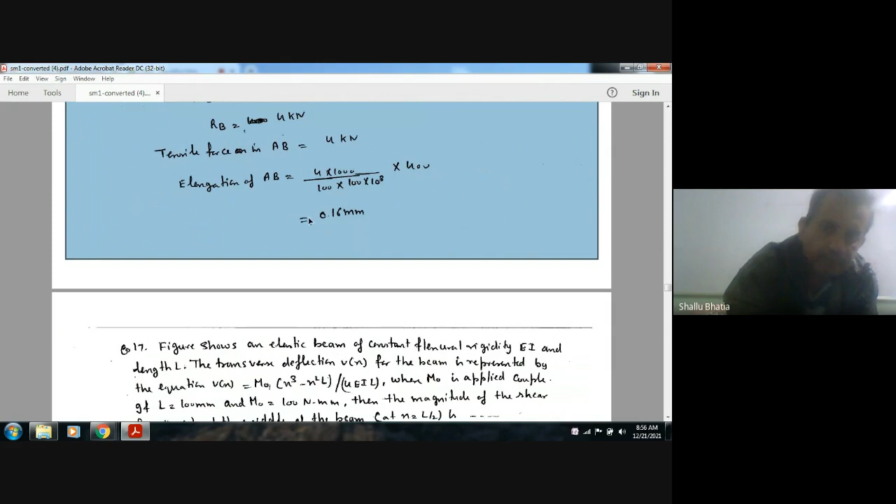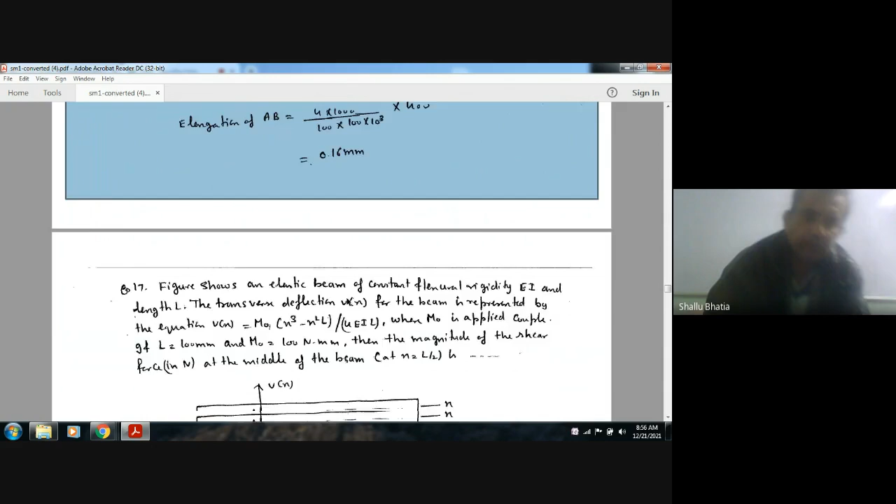Okay, so the answer is 0.16 mm. Okay, the answer to question number 16 is 0.16.

Next, figure shows an elastic beam of constant flexural rigidity EI and length L. The transverse deflection Vx for the beam is represented by the equation Vx equals m0 times x cube minus x square L divided by 4 EIL.

Where m0 is the applied couple, L is 100 mm, m0 is 100 Newton mm. Then the magnitude of shear force at the middle of the beam at x equals L by 2.

So here V is the transverse deflection at distance x. Okay.

Now we know that, sorry, we take this EI here, okay, and then differentiate it, okay.

Then dV by dx is this quantity, okay, and then again differentiating, EI d square by dx square.

So this is the derivative equation, okay, and in this equation this is the value of the moment, okay. So m is your m naught times 6x minus 2L.

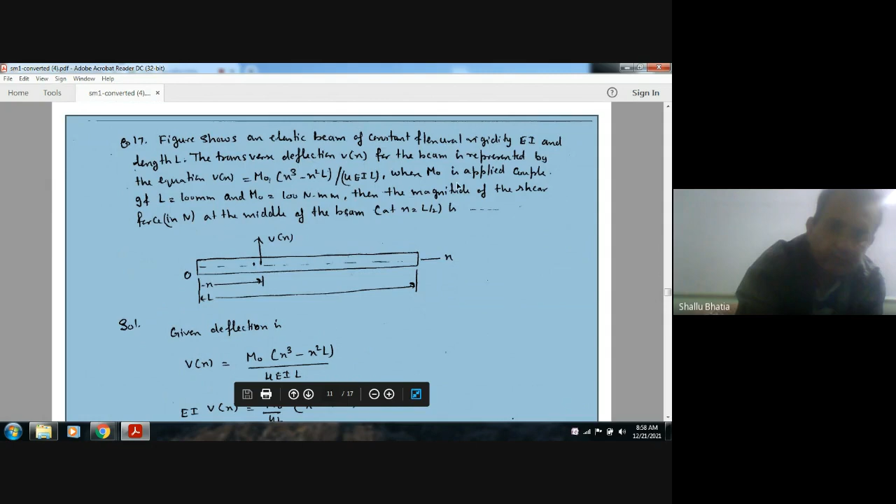Okay, the shear force at the middle of the beam. Okay, the magnitude of shear force is, now we know that the shear force is dm by dx.

Okay, so F is your m naught divided by 4L times 6. Okay.

So the shear force is dm by dx. Okay, dm by dx, so this is your 6 m naught by 4L.

Okay, so m naught is your... m naught is your 100 Newton mm. Okay, and...

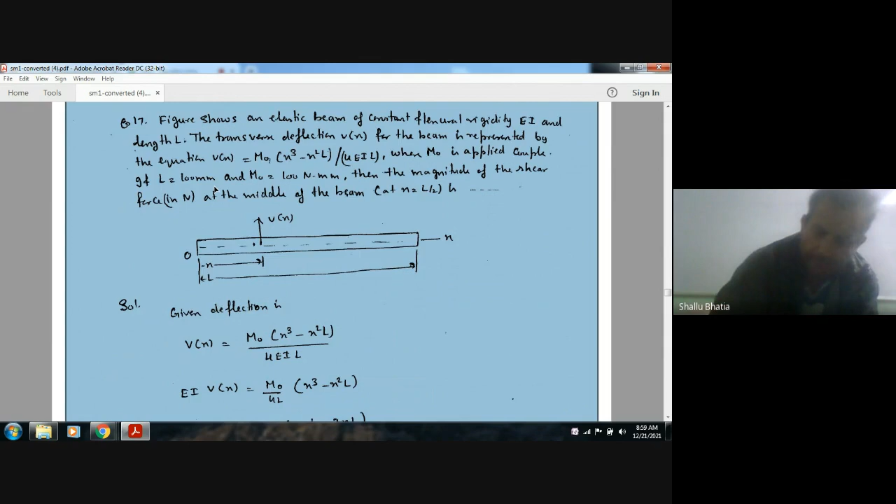L is your 100 mm, okay, and we have to find out that at L by 2.

Okay, so we have already put that X, okay, we need not put X again, okay. It should be the same everywhere, okay, so X is not there.